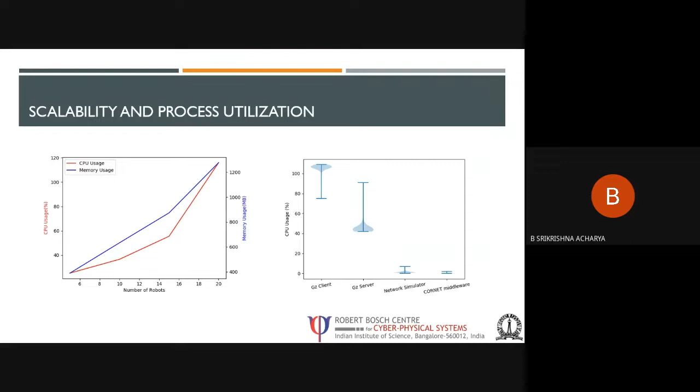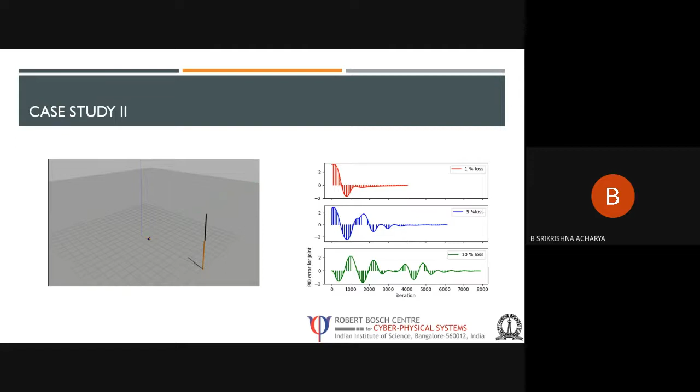For both case studies 1 and 2, the control algorithms are developed using ROS, and the source code is also available in the GitHub that I will be sharing in the end. And we will try to demonstrate a few videos on the overall operation of this particular co-simulation framework.

As you can see here, we are sending the commands to make the drone centered and then sending the commands to the drone to make it land. This is the first scenario, where we try to do a network assisted drone landing. For this, we have used this kind of scenario to demonstrate this particular use case.

And we also demonstrate this use case with two drones. In this use case, we try to have communication between the drones in such a way that both drones are used for a surveillance kind of application. As you can see here, the first drone is doing a surveillance mission that has been allotted to it. And whenever the drone finds some sort of difficulty, for example, the drone battery is critically low, we can schedule another drone to go to the same location and restart the mission. So that is what we demonstrate in this particular demo video.

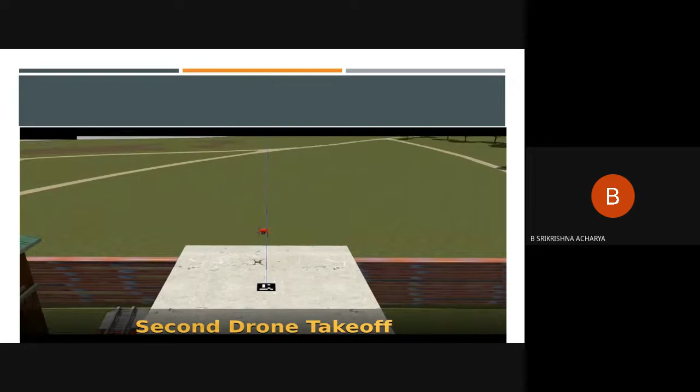As you can see here, the drone is moving around this particular area. It has been doing a surveillance mission that has been allotted to the drone. As you can see here, we have created a situation where the battery of the first drone is low, and immediately we send a command to the second drone to start the mission and replace that particular drone. So the second drone takes off and goes and replaces the first drone, and it continues the mission.

So the first drone comes back and resumes its charging on the drone pad here. So here we used the precision landing algorithm using onboard sensors itself. But all in all, the idea is to have the communication between the drones. So here, the second drone will continue the surveillance mission as the first drone was doing.

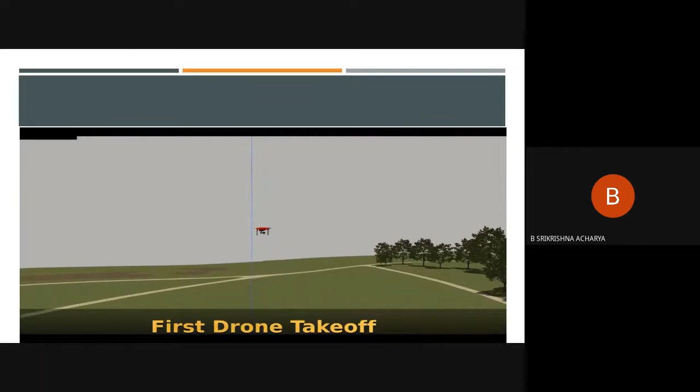So when the second drone has some issues, again the first drone will take over and replace the second drone. So basically, we can do some sort of unmanned aerial missions with drones communicating with each other, and we don't need to do anything on top of it. So these kind of autonomous missions can be managed using this kind of co-simulation framework that we are developing right now.

So this is the demonstration of this particular use case.

In the next use case, we demonstrate a ground robot scenario where we try to pass information over the network about the other robot, used for proactive collision avoidance. In the first experiment, we are not passing the information over the network, and there is a potential collision situation because the onboard sensors on the robots cannot detect the other robot around the corner.

Now we repeat this experiment by passing the information over the network. As you can see, the information about the other robot is passed, and that is the reason the path is dynamically updated for each of the robots. Both robots' paths are dynamically updated and they avoid each other, and the mission is successful here.

We try to demonstrate this experiment with real robots as well, and this is what we actually demonstrated with 2 Volta robots here.

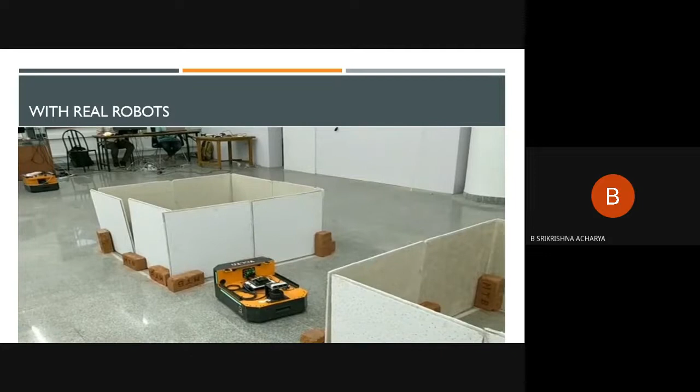As you can see, because this robot is actually not in the lidar range of this particular robot, even then the robot scheduled its path to avoid this robot, went the other way around, and continued its trajectory. The mission was to come around here. So the other robot, even though this is the shortest path, took the longer path because this path is not allowed. Over the network, it knows this particular robot is available here.

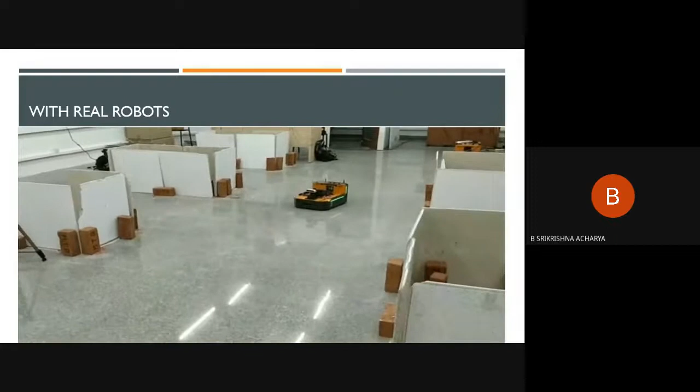Now, without passing the information over the network, the situation will be bad because this particular robot thinks that this is the shortest path and it will try to come around here. You can see in this video how the robot behaves when this kind of situation arises.

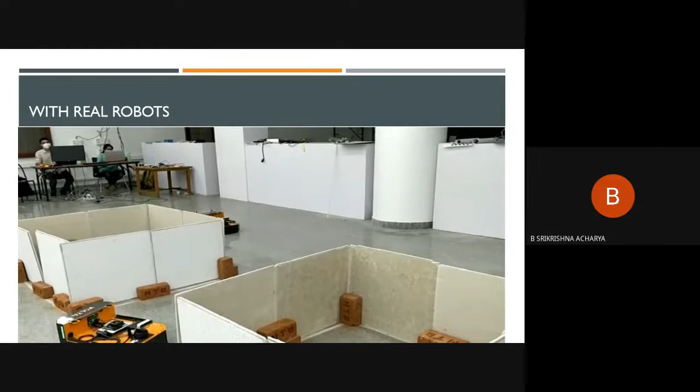This robot tries to take this path, and as soon as the lidar recognizes that there is a dynamic obstacle, which is the other robot, in this vicinity, it immediately has to replan and go back and start this mission again.

This will result in longer task execution time, as well as requiring a lot of replanning for the robot. It has to take much longer paths than actually intended. This is the kind of demonstration that we try to do.

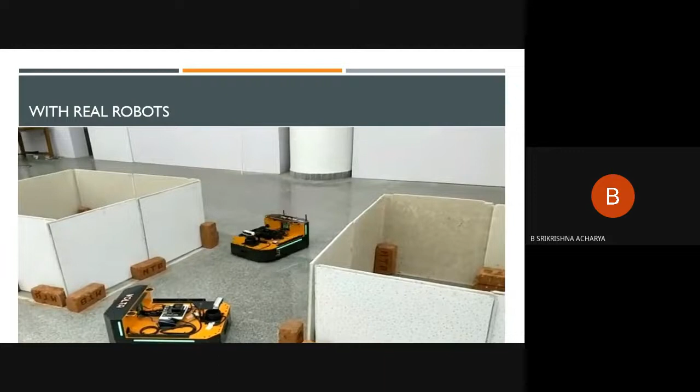Whatever we try to do over the real simulation, co-simulation framework that we developed, we also try to realize using real robots as well. So that was the kind of update that we have in this particular video.

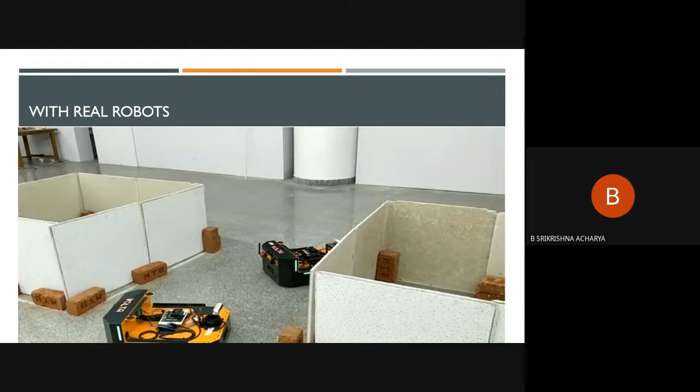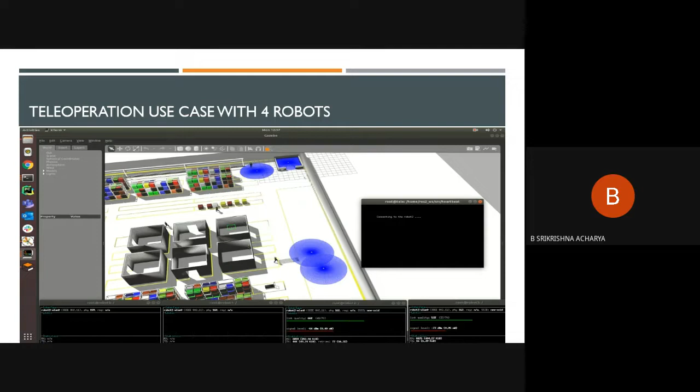So that's the core idea here. So, all in all, the overall idea is basically, we initially started with the CORNET 1 framework, which was published in COMSNETS 2020. There we used NS3 as the communication tool, or network stack. And in CORNET 2.0, we have shifted to Mininet Wi-Fi with ContainerNet support, and that was recently accepted in the COMSNETS

conference. And we have also extended it with containers, and the major differences between CORNET 1 and CORNET 2 are basically that they are not tightly coupled with the robot applications, and the choice of physics simulators and network simulators is independent. You can use any network simulator.

Right now, we are developing the 3rd version of CORNET, where instead of Gazebo, we will also have other physics simulators like Carla, AirSim, or something like that. And at the same time, we are also bringing back NS3 to provide an LTE kind of communication stack. And we are also bringing in the Mininet Wi-Fi simulation framework, because that provides very good container support. Basically, we extend the ContainerNet based virtualization for the robot nodes for scalability purposes.

At the same time, we are also providing network simulations from NS3 like LTE and 5G kind of scenarios. And we also developed a network-aware collision avoidance algorithm using this particular framework, and we have submitted it to ICRA. So that is also under review.